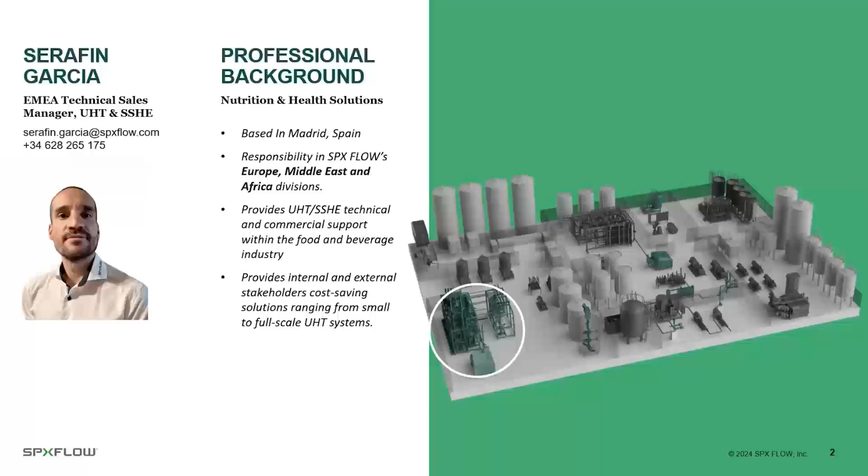Just a second to remind you of our purpose, that is to improve the world through innovative and sustainable solutions.

This is going to be the agenda for today. We will be discussing some basics on UHT systems, and we'll get deeper into the energy savings options that we've got within our portfolio of solutions. Then we can finalize the presentation with some information about our innovation centers, our pilot plants, and our performance agreements.

So this is an example of a plant-based processing line. In this case, we are talking about oats as the raw material, and it's a typical line from SPX Flow. You typically start with the flour, and then you end up with the oat beverage drink at the end of the line. Normally we try to have a conversation with the customer to understand how they want to do things and how we can incorporate some of our experience to improve their processing lines.

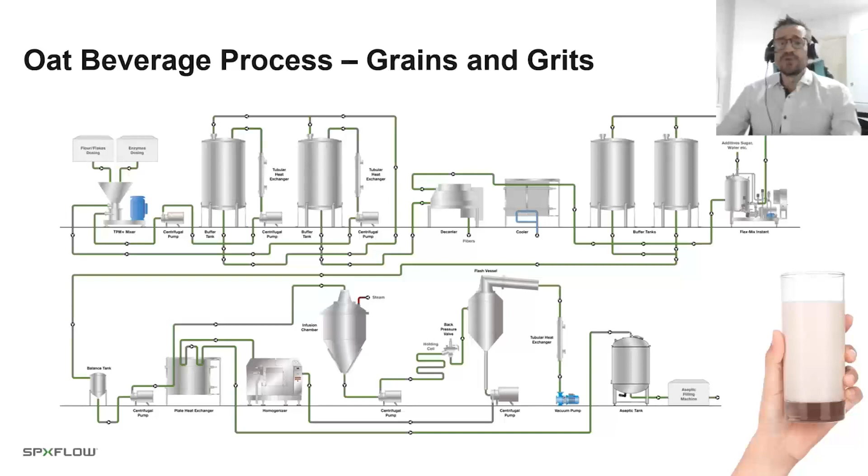In plant-based processing, there are several challenges where SPX Flow stands out as a market leader in UHT technology, and that is the best way that we have to show our commitment to sustainability. In fact, famous plant-based producers are trusting today in SPX Flow as we keep delivering solutions on waste reduction, energy efficiency, and keeping the taste, the flavor, the texture that our customers want, without compromising on food safety.

We have dedicated innovation centers to carry out trials and test new recipes. Thanks to many years of experience, we can ensure sterile products with minimal nutritional and organoleptic changes. We can also help customers create solutions meeting local regulations, local legislation, and contribute in that way to a greener overall food and beverage industry.

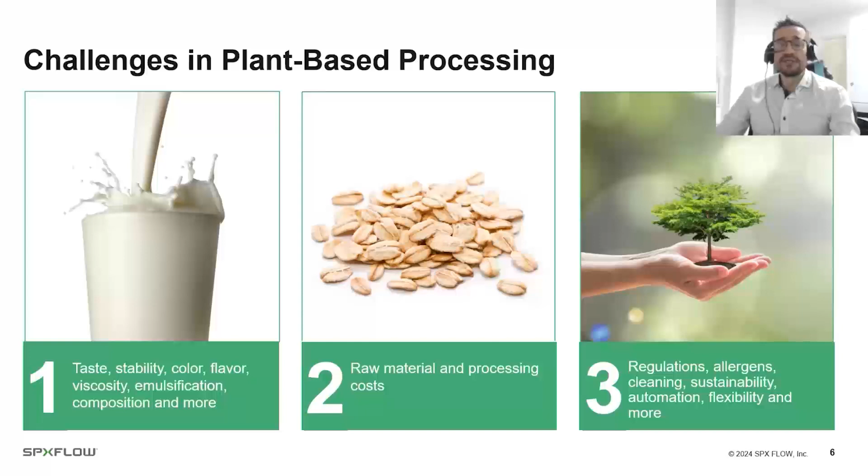Within the Infusion Plus, I would say it's been the most innovative development that we have seen within thermal technology for many years. We can achieve really high temperatures, up to 157 degrees, with short holding times, less than 0.1 seconds. That is actually giving you extremely high quality results in terms of the quality of the product, and also 70% less vitamin loss than other treatments.

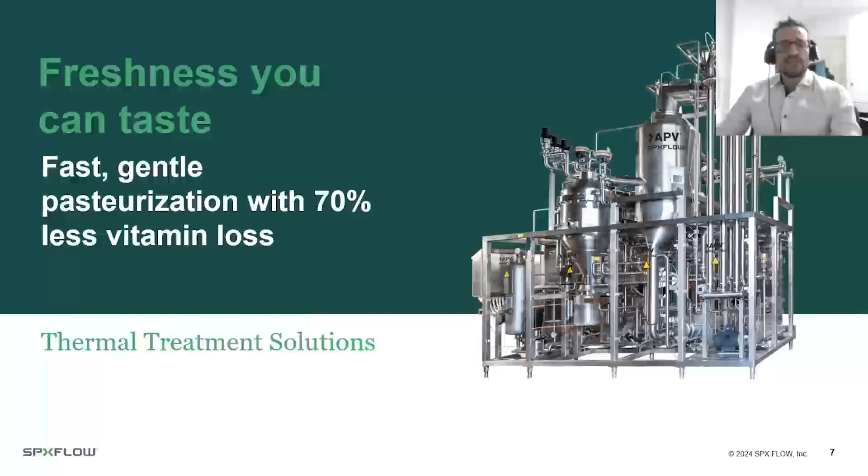The Infusion Plus is actually the perfect technology to produce ESL beverages because you get pretty much the same high quality and taste as a normal high temperature, short time procedure, but with the advantage of having a longer shelf life. So we can get up to 45 days if we preserve the beverage in the cold chain at 10 degrees, versus a pasteurized product that could have a shelf life of typically a week. So you can see the added benefit in terms of the shelf life.

Just a quick definition of UHT for those people that are new to this topic. The UHT process is a food processing technology that we are using to sterilize liquid food products. Essentially what we do is heat them to very high temperatures for a short period of time. And the benefits of this process are that you can get an extended shelf life, because we can actually get up to a year, depending on the raw material quality.

You can also get extended food safety without compromising on the nutritional value. And also, finally, you've got the possibility to increase your business because you don't need the cold chain during the transport and the storage. So that is quite convenient, especially in those countries where the cold chain is not that developed.

Just a quick difference between pasteurization and sterilization. In the pasteurization, even though we are eliminating the bacteria, there will be spores that would survive the thermal treatment. So we need the cold chain, and also these products would have a much shorter shelf life. Typically, we are talking about a week or a few days.

Within the UHT processing, we can differentiate between direct UHT and indirect UHT. In the direct UHT, we have an actual mix between the steam and the product, and we can further distinguish between infusion and injection. In the infusion, it is the product going into the steam, and in the injection, we've got the steam going into the product. In the indirect UHT systems, there is no mix between the steam and the product. The energy, the heat, is transferred from one fluid to another across a thermally conducting barrier, that could be, for example, the metal walls that you've got in a plate heat exchanger, a tubular heat exchanger, or a scraped surface heat exchanger.

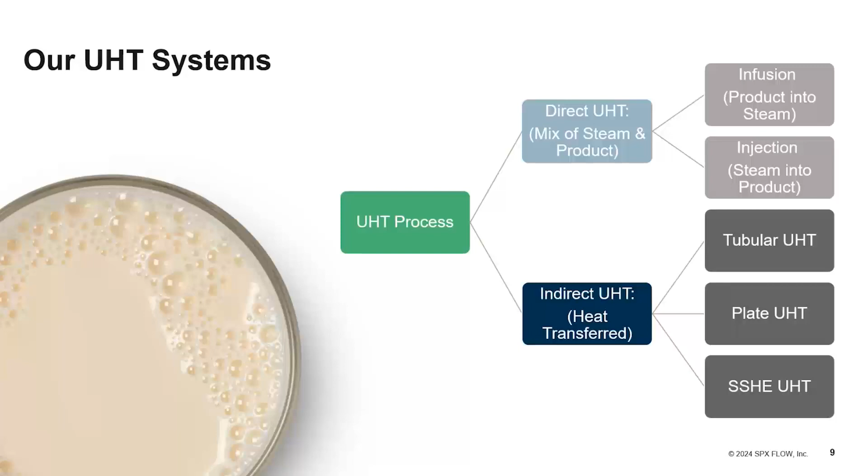This is a generic schematic of one of our infusion plants. So the working philosophy of the plant would be as follows: you've got the product sitting on the balance tank, and that product would be pumped by means of a centrifugal pump into the multi-section plate heat exchanger, where we carried out the preheating in the first section.

Then the product goes into the infusion vessel, where by means of the distribution nozzle at the top it is introduced and put into contact with the steam, which is in the vessel. During the flow of the product from the nozzle to the bottom of the vessel, the product would reach the target sterilization temperature. After that, the extraction pump sitting below the infusion vessel will push the product into the holding section, and from there directly into the vacuum vessel, where the steam would be flashed off.

As a result, the temperature of the product is reduced. The product then goes into the aseptic homogenizer, and back to the plate heat exchanger where we do a final cooling. Finally, the product can directly go into the filling machine if it's ready to work, or it could be aseptically stored if we've got a sterile tank available on the factory.

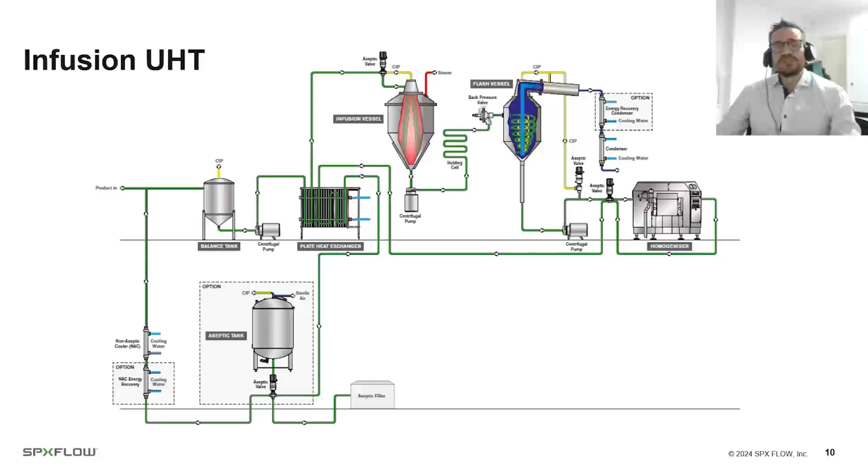In this slide, we can see in more detail our infusion vessel, which is where the magic happens. The vessel is completely full of steam, and by means of our distribution nozzle at the top, working essentially like the shower we have at home, we create many different product streams, obtaining a large heat transfer area. You can see the product streams in yellow, surrounded by steam in red. Below the distribution nozzle, we can install a spray ball so air can be removed during production, and we can also utilize that same spray ball to CIP the tank.

The product temperature is precisely controlled by means of pressure. We can also highlight that the heating rate within the tank is extremely quick, around 600 degrees per second. The delta T inside the vessel is also very tight, so we can guarantee that the product is not thermally stressed. The heating is very gentle, giving you a superior product quality with minimum organoleptic changes.

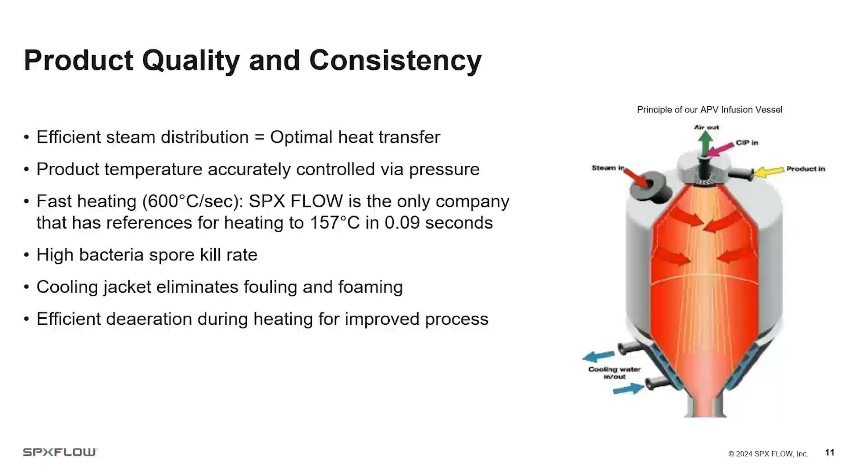On the utility consumptions and operational efficiency part, we can install a high definition camera inside the vessel. This allows us to have real-time information on the performance within the infusion vessel, so we can monitor the fouling rate. This visual input allows us to perform CIP only when it's really needed.

These days, with operators sitting in the control room, they can easily look at the camera, realize what's happening within the vessel, and decide if they have to switch from production into CIP mode, or if they can just perform an intermediate aseptic cleaning to continue with the production.

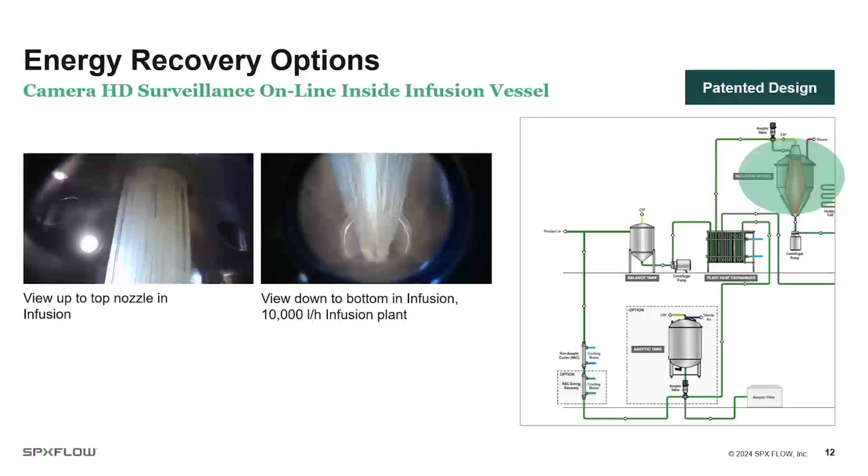Then we have the NAC, the non-aseptic cooler, which is a tubular heat exchanger that we use for cooling of the circulated water to about 95 degrees during the pre-sterilization phase. We can recover up to two thirds during this pre-sterilization phase. To give you an idea on the numbers, on the heating load you could be saving up to 563 kilowatts, for a flow rate of 14,000 liters an hour in your UHT line.

So if you add all of those savings during a year, you realize that you're saving a good amount of energy. The payback time is fairly quick, and obviously you can benefit from those energy savings during the complete life cycle of your UHT plant.

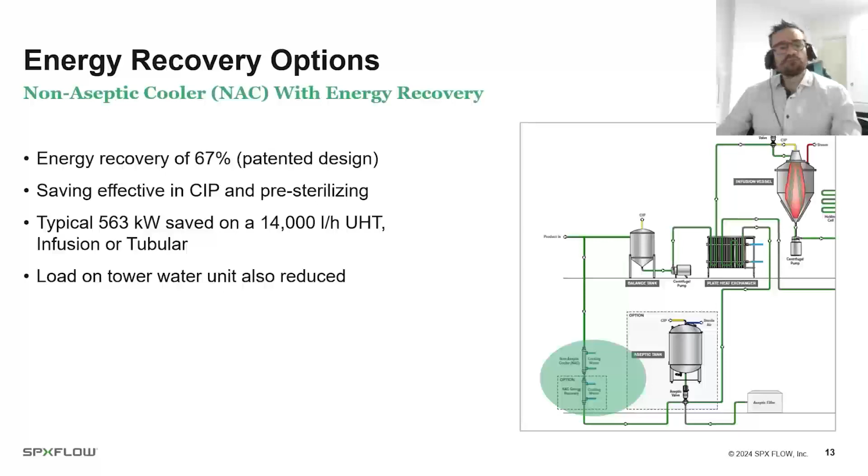Within the aim to reduce the total cost of ownership, to reduce as much as possible the OPEX, we can also offer the top condensers, or recovery condensers, where we could be recovering up to 12% from the condensated steam on its way out from the vacuum vessel. As you can see in the drawing, on the vapor duct, we can recover that vapor and reuse it in our UHT plant.

So on a typical thermal profile for an infusion plant, we could easily be reusing this energy to do the preheating in the multi-section plate heat exchanger. For example, we could be doing the thermal jump on the preheating in the plate heat exchanger from 4 to 78 degrees, just with the energy that we are recovering from the vacuum vessel.

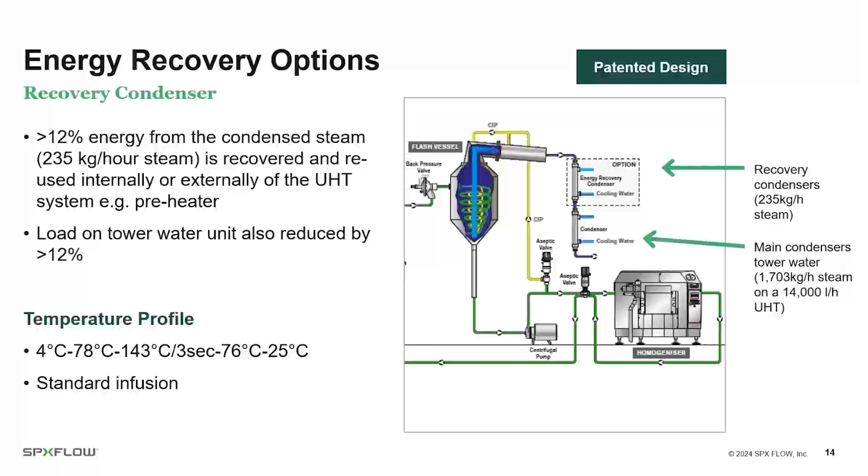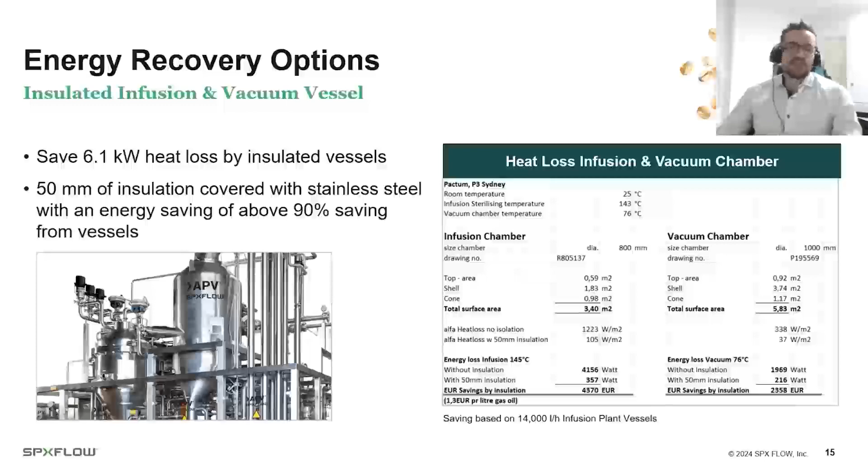We can also insulate the vessels, so we can do that for both the infusion and the vacuum vessels. Essentially, we would be installing some mineral wool insulation with a stainless steel cover to save on that energy and avoid the heat loss in those vessels.

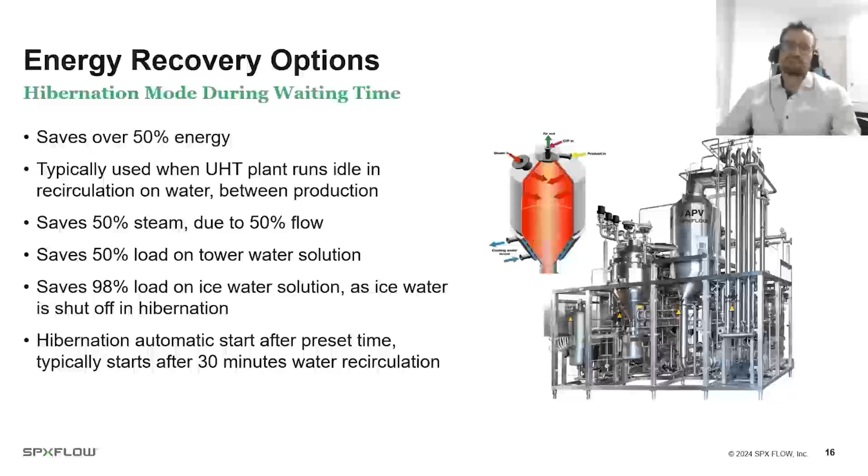Also, we can save some energy if we decide to go with a hibernation mode during the waiting time. After the CIP and sterilization, you are typically running with water to maintain sterility. With the hibernation mode, you can set the system at 50%, which would be like a 50% saving on the utilities. That means you would be saving on steam, on water, and on ice water.

Here we present our latest NPD to reduce fouling and increase running times. We are calling this the APV seamless infusion vessel, and that could help you increase the efficiency and sustainability, as it minimizes fouling and in that way extends the running times.

The APV seamless infusion vessel prevents fouling in two ways. There is no sealing gasket between the vessel bottom and the pump housing for fouling to build up, and also it has better water cooling on the pump casing and the impeller, so we can reduce the temperature in that connection area.

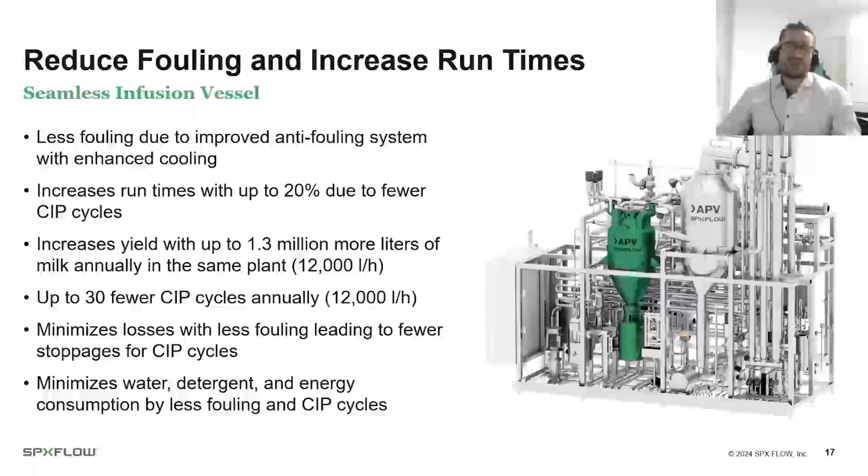So essentially, you get increased uptime, and therefore you are saving on CIP because you need to run fewer CIP cycles. As a consequence, you are reducing the overall consumption of water, chemicals, and energy.

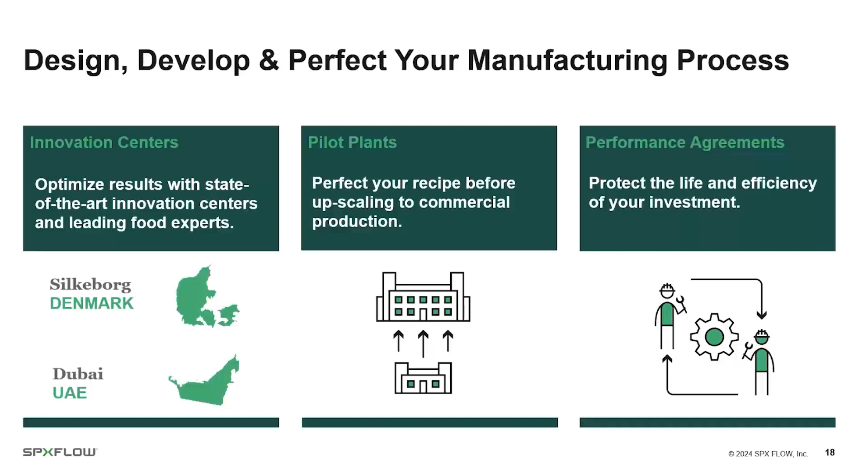We have two innovation or development centers where you can test your products. One is located in Dubai, in the Emirates, which we set up in close collaboration with the filling company SIG Combibloc some years ago, and we've got another one in Silkeborg, Denmark. Especially for plant-based applications, we can do many different trials with our technicians in both innovation centers because we've got a lot of experience in the field.

We have pilot plants essentially where you can try your new recipes. We also have the possibility to offer you some pilot plants that you can rent, so you can do your own trials in your facilities. And of course, we can sell you pilot plants, tailor-made to whatever needs you might have, so we can really customize the pilot plants for you.

And we also have performance agreements. These agreements are structured to ensure that our technology and our plants are consistently meeting the performance expectations you have. By entering into a performance agreement with SPX Flow, you can benefit from agreed performance metrics.

You can also benefit from maintenance and support from our field engineers during planned shutdowns, remote monitoring of KPIs to track performance against targets, and troubleshooting. We can set up specific trainings for your technicians, plan on delivering the needed spare parts, and organize various audits from our process engineers to improve your lines.

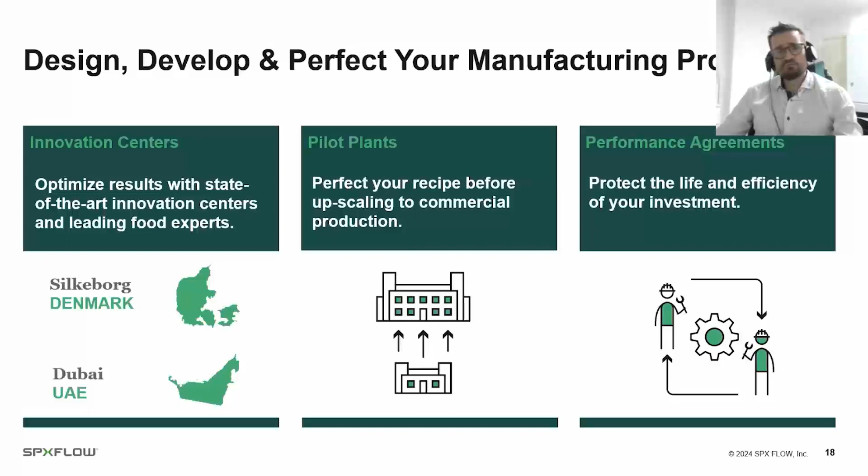As you might be aware, our team is sharing this full series of webinars, representing how our company SPX Flow is capable of supporting you during every step of the process. In the communications materials, you should be able to find links to past events, and also the ability to register for future webinars that might interest you. In the next sessions, we'll be talking about membranes, about CIP, and also about plant-based fermented products.